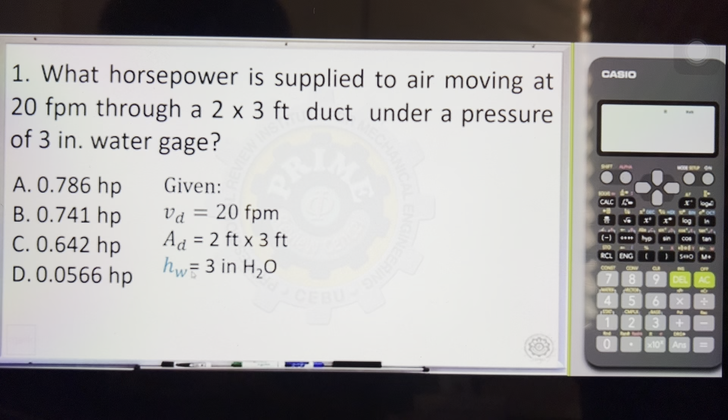So, ang tinatanong is the horsepower developed. Okay, so these are the given. So, yung velocity natin, ito yung discharge velocity, 20 feet per minute, passing through, ito yung discharge area, 2 feet by 3 feet. And then, nagbigay na height in water. Ang height in water natin is 3-inch water gauge or H2O. So, tinatanong is the air power. Okay, ang choices is in terms of HP.

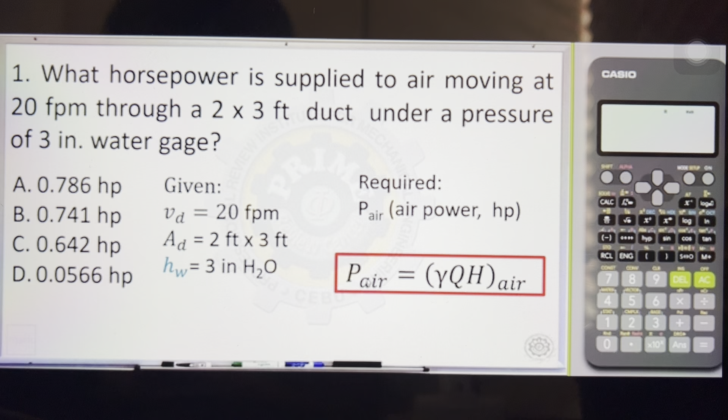Okay, ang working formula natin, gamma QH. Now, analyze natin. Okay, so para masagutan yan, kailangan natin makuha yung H ng air. Now, ang formula ng H ng air, yung total head ng air, that is HS plus HV. Yung HS natin, ito na yun mismo. Okay, convert na lang natin papuntang HS in air.

Okay? Now, how about yung HV? Yung HV natin is formula dependent. That is the velocity head. Vd squared minus Vs squared over 2g. Since walang binanggit regarding sa suction velocity at wala naman data para masagutan yon, pwede nating i-assume yun na 0. So, magka-cancel out lang ito. Okay, and then, substitution yon. So, you have the velocity head.

Okay. Yung Vd natin dapat feet per second. Okay. Sa mga units. So, i-divide lang natin ng 60. So, you have 20 feet per minute. Okay. Yung 60 na ito is for conversion purposes. Kaya dinivide ng 60 para maging per second, squared, twice ni gravity. So, 32.2 kasi naka-English tayo.

Okay. So, makukuha natin yung velocity head. Okay. This is feet per second. Kaya dinivide ng 60. Okay. Convert yung feet per minute papuntang feet per second. So, calculate natin. So, you have 20 over 60 squared all over 2 times 32.2.

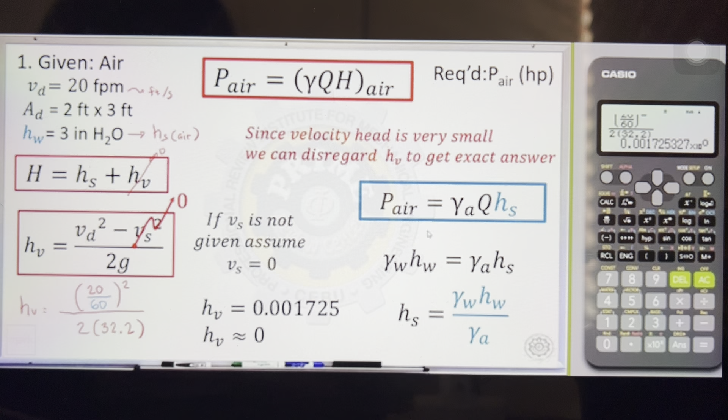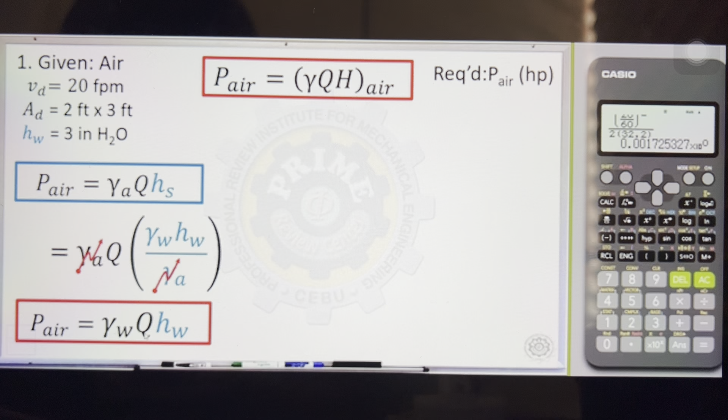Okay. So, palitan yung HS ng gamma ng water, height ng water over gamma ng air. So, by technicality, lagi itong magka-cancel out. So, bottom line, gamma QH ng air is the same sa gamma ng water, QH ng water. So, pwede pala yung gamma QH in water kasi magka-cancel out lang yung gamma ng air. Again, gamitin lang yung formula na yan if HV is 0. Pag yung HV merong value, hindi pwede gamitin yung shortcut na to.

Okay, balik ka dito sa original formula. Pero since negligible yung velocity head, pwede magamit yung gamma ng water, Q, multiply sa H ng water. So, madali lang. Yung Q, pwede yan masolve using area multiply ng velocity. So, you have area discharge, velocity discharge. Okay, ang kailangan na lang unit analysis kasi ang kailangan final answer is HP.

So, substitution tayo. You have air power equivalent sa gamma ng tubig in English, 62.4. Ang unit noon is pound force kada cubic foot. Okay, multiply ko ng Q. Area is 2 by 3. Velocity is 20. Okay, kung tinitingnan nyo yung unit, this is square feet, tapos this is feet per minute. So, corresponding unit niyan is cubic foot per minute.

Okay, cancel out natin yung cubic foot. And then yung height ng water is 3 inches. So you have 3 inches. Gawin natin foot. So you have 1 foot, 12 inches. Okay, so conversion lang yun. Cancel out na rin yung inches.

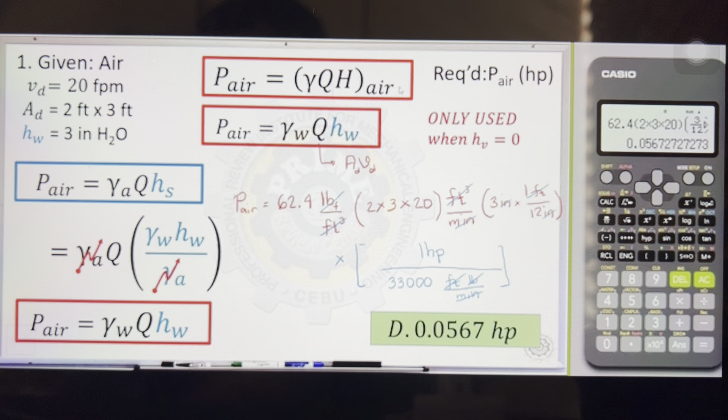Pag HV is negligible, a very small number, gamma QH ng water. So, ang kailangan lang palagi, unit analysis. So again, this is problem number 1.

Okay, problem number 2. A fan draws 1.42 meter cube per second of air at a static pressure of 2.54 centimeter of water through a duct of 300 millimeter and discharges it through a duct of 275 millimeter. Okay, determine the static fan efficiency if the total fan mechanical efficiency is 70% and the air is measured at 25 degrees Celsius and 760 millimeter mercury.

Okay, so meron tayong volume flow rate. Okay, you have the static pressure. Ito yung height in water, 2.54 centimeter. Yung 300 millimeter, ito yung diameter at the suction, and discharges at 275 millimeter diameter sa discharge. Given yung EM, then yung temperature and pressure, tinatanong static fan efficiency.

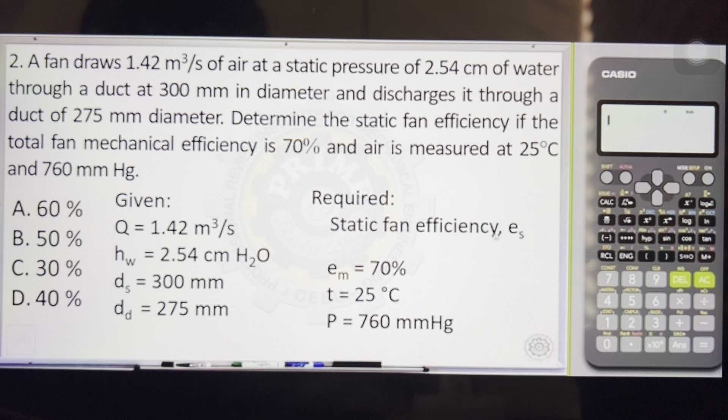So, isolate natin yung mga given. So, malinaw yung mga given na yan. Ang tinatanong is ES. Okay, so pakita natin yung working formula. So, ang working formula para makuha si ES is mechanical efficiency multiplied sa HS over H. Okay, yung mechanical efficiency is already given. Walang problema doon. Yung HS, nakukuha yan dito sa height in water. So, masasolve yan easily. And then yung capital H, this is the total head.

Okay? Ang formula ng total head is HS plus HV. Okay, so dalawa yung kailangan i-solve. I-convert yung HW na yan, cm in water, papuntang meters of air para makuha natin si HS. After makuha si HS, next naman natin kunin yung HV. Okay, so paano mag-convert ng HW in terms of meters of air?

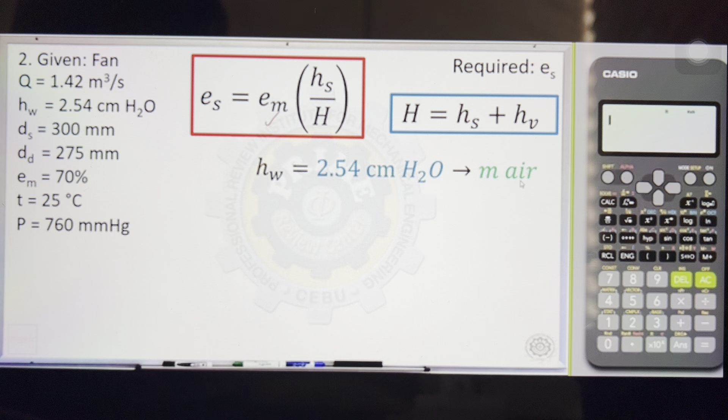You can use gamma or you can use density. Pwede yun. So we can use density ng water, height in water, density ng air, height in air. Yung height in air, yan yung kailangan natin as HS. Now, we cannot use 1.2 para sa density ng air kasi hindi ito STP. Yung pressure natin at STP yan, so 760 mm mercury, that is the same sa 101.325 kilopascal. Kaya lang yung ating temperature, hindi naman siya standard eh. So kailangan natin i-solve yung corresponding density of the air for this condition.

Okay, so para makuha yung density ng air, P over RT. So makukuha natin yung HS dito. So substitution tayo. So you have density ng water, 1,000 kilogram per cubic meter. Okay, yung height in water, meron tayong 2.54 centimeter. Gawin ko na siyang meters. So lagay ako ng converting factor dito. Okay, 1 meter is 100 centimeter, para meters yung sagot natin.

So, cancel out yan. Equivalent sa density of the air. Para makuha yung density ng air, P over RT. So you have your pressure na 101.325. Okay, yung R ng air, constant, 0.287. Then yung temperature ng air dapat absolute, Kelvin. So you have 25 plus 273. Okay, SI units, ang unit ng density is kilogram per cubic meter.

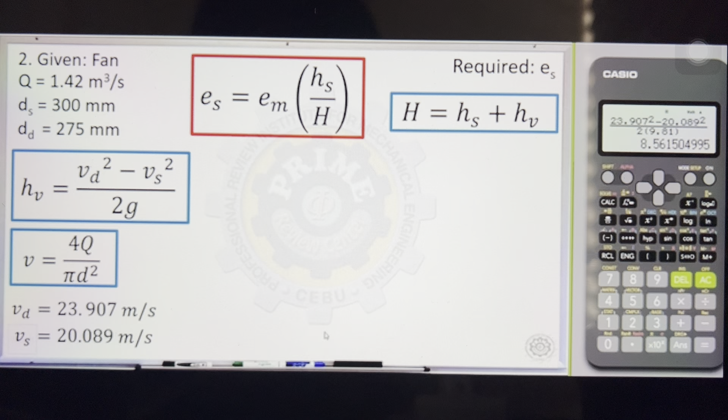Okay, so tapusin na natin yung last part para makuha yung static fan efficiency. By substitution, makukuha na natin si ES. So you have the static fan efficiency equivalent sa, ang mechanical natin, kung mabalikan natin yung given dito, 70%. So ang mechanical efficiency is 70%, so 0.7. EM is given, ilagay ko lang dito, 70%. HS natin is na-solve naman na, equivalent sa 21.439. Ang total head is additive ng HS sa HV.

21.439 plus 8.561. So solvable yung static fan efficiency. So let's press our calcu. This is 0.7, times 21.439, over 21.439 plus 8.5615. So ang static fan efficiency natin is 0.500235. Obviously, approximate is 50%.

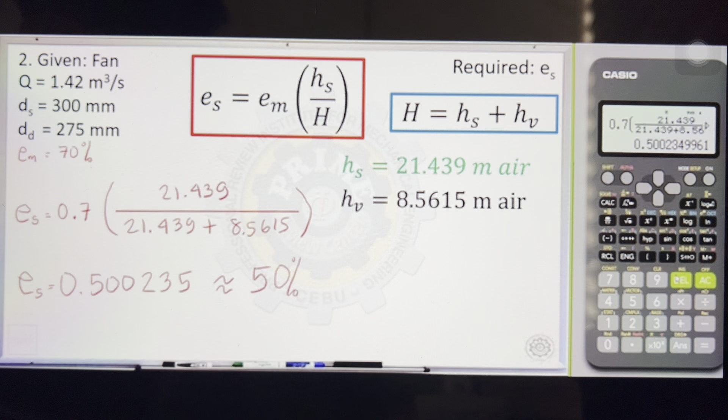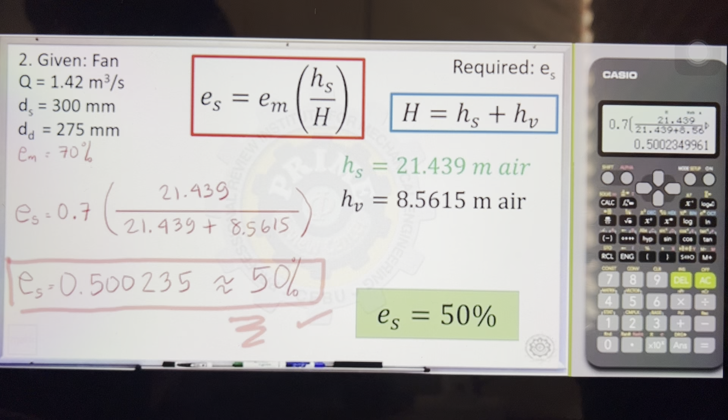Okay, so that's it. Nagamit natin yung mga formula, yung mga conversion. Meron tayong sample problem for English units, and then this is SI. So kabisaduhin yung formula, practice, and then mag-unit analysis. Again, this is problem number 2.

Okay, affinity law for fans and blowers. Now, since kabisado na natin yung affinity law para sa pumps, i-adjust lang natin yan ng konti para sa affinity law ng fans and blower. So they have the same formula dun sa geometrically similar na pumps. Kaya lang this time, i-consider din natin yung density. So again, para sa pumps na geometrically similar, Q, H, power. So same lang din yon para sa fans and blower. Parehas na parehas dun sa geometrically similar.

Kaya lang since this is fans and blower, dagdagan nyo lang ito ng additional row na 0, 1, 1 para sa density. So Q, H, power, 0, 1, 1 density. Ito lang yung pinakadagdag. Same approach. So magre-ratio lang tayo, and then yung mga numero na yan yung magiging exponents. Since yung ating density, katapat niya 0 dito, so yung ratio ng density raised to 0 is 1.

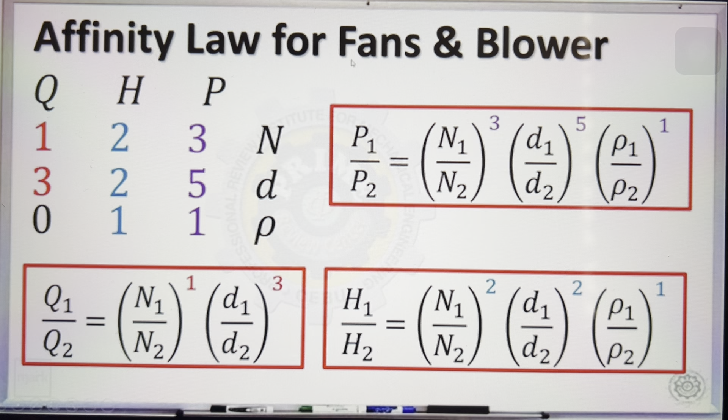Problem number 1. A certain fan delivers 12,000 cubic feet per minute at a static pressure of 1-inch water gauge when operating at a speed of 400 RPM and requires an input of 4 horsepower. If the same installation of 15,000 CFM is desired, what will be the new speed and the new power needed?

So we will use affinity law for fans. Ang given is Q1, 12,000 CFM. Yung H1 natin, yung head is 1-inch water gauge. N1, speed, 400. And then power 1, 4 HP. And then you have changes sa Q. So from 12,000 CFM, naging 15,000 CFM. So pag pinalitan yung Q, what will be the new speed and the new power? Yun yung mga hinahanap.

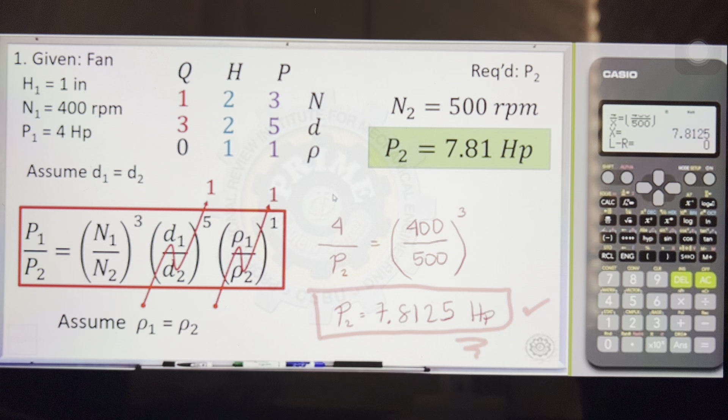Problem number 2. A fan described in a manufacturer's table is rated to deliver 500 meter cube per minute at a static pressure gauge of 254 centimeter of water when running at 250 RPM and requiring 3.6 kilowatts. If the fan speed is changed papuntang 305 RPM and the air handled were 65 degrees Celsius instead of standard na 21 degrees Celsius, what should be the power in kilowatts?

So let's isolate the given. So ang tinatanong is the new power pag pinalitan yung speed. By the way, yung 65 degrees Celsius, ito yung temperature dun sa bagong power. And then yung 21 degrees Celsius, ito yung temperature dun sa original na power. May original na power na nakuha, 3.6.

Isolate the given. So you have Q1, 500 meter cube per minute. H1, yung head, 254 centimeter water. Speed 1, 250 RPM. Power 1, 3.6 kilowatts. And temperature 1, yung standard, 21 degrees Celsius. So, pinalitan dito yung N2, naging 305 RPM. And then yung temperature, pinalitan din, naging 65 degrees Celsius. So, with those changes, ang tinatanong is the new power at these conditions.

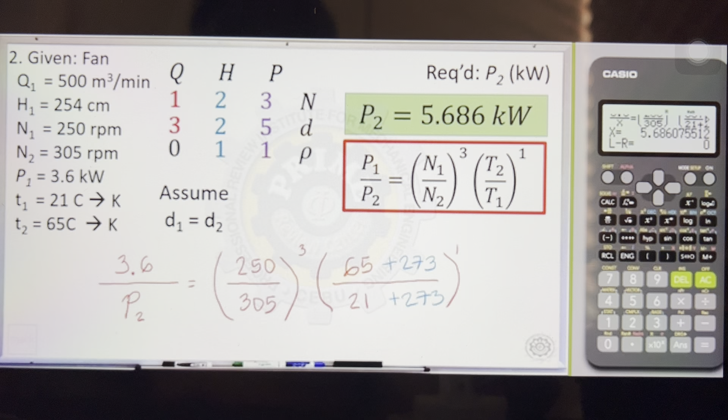Every time magbibigay ng temperature, ganito yung parating mangyayari dyan kasi denominator sila, so magiging T2 over T1. Use the affinity law correctly and then be sensitive lang dun sa ratio ng temperature, kailangan absolute. So this is fans and blower. Hopefully na nasabayan natin at natutunan. Lipat sa index card yung mga formula and then mag-practice.